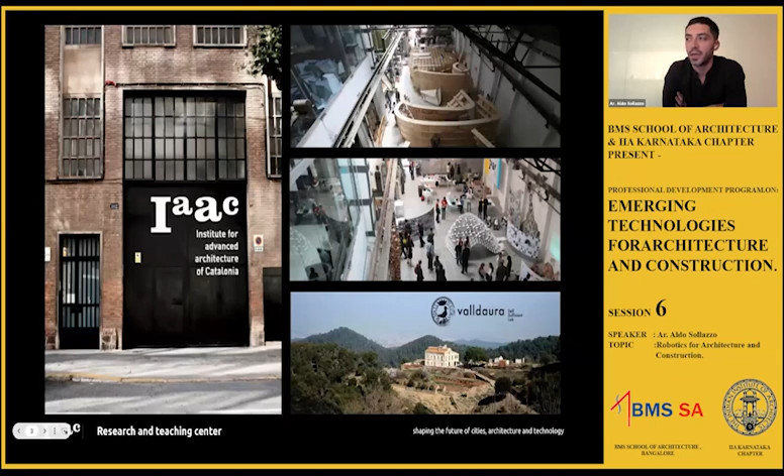First of all, you already gave an introduction of who I am. I opened the company of Numena in 2011, and for almost 10 years, I've also been working with the Institute of Advanced Architecture of Catalonia. The institute is located in Barcelona. We have different facilities distributed along the city, but we mostly work around the topic of research, education, development of solutions and agendas that can also go beyond pure academic interest.

And we organize, as you do in your university, in your school, a series of events like this one, expositions, publications, podiums, etc. But in Barcelona, IAAC, the Institute for Advanced Architecture, is also very important for the presence of one of the first Fab Labs in the world, Fab Lab Barcelona, which became a crucial point to spread this philosophy of advanced manufacturing and digital fabrication. This philosophy connects all the new tools and instruments arising in the world of design and manufacturing towards a new industrial application that can establish a new agenda on how things can be made, how can we be more efficient, more resilient, more sustainable in the way we think and make objects and projects.

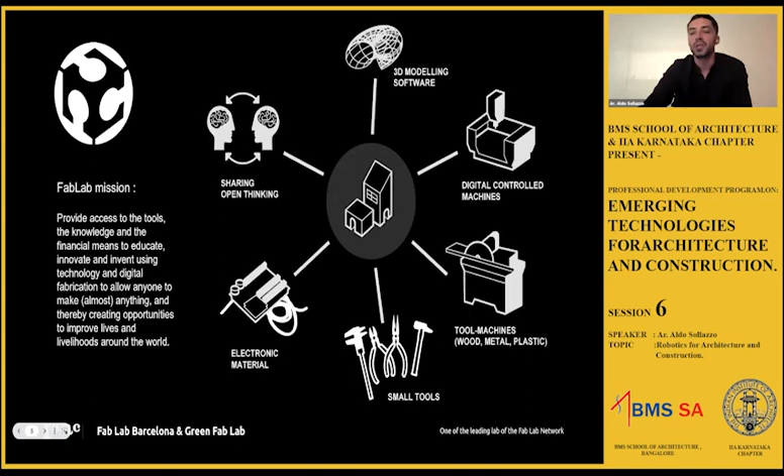So in order to make, we use a lot of cutting edge machines that I'm sure you also have in your facility, from big 3D printers to CNC milling machines, robotic arms. These are the instruments that we use to manipulate matter. But on the other side, we also like to introduce codes and algorithms that allow us to program digitally spaces, and control variety and geometrical solutions that respond to a specific manufacturing process.

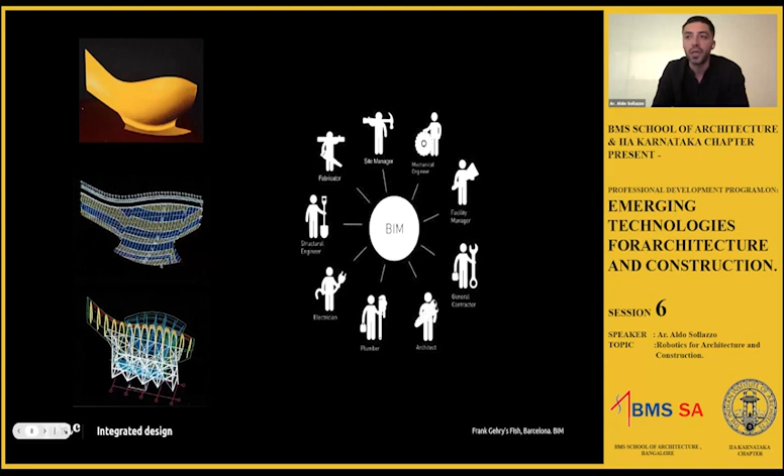Of course, all these criteria are always connected to how, historically, if you look at the history of building information modeling, Barcelona is a starting point for this. You can recognize on the left side the drawings, sketches, and the 3D model of this installation by Frank Gehry, an installation that represents the very first application of BIM, Building Information Modeling, even though it wasn't called that when Gehry was implementing it. It was about how to connect complex morphologies to a new fabrication protocol that allows shifting from the digital directly back to the physical environment. The digital and the physical are two main cornerstones of who we are in Barcelona, and how we operate in this ecosystem.

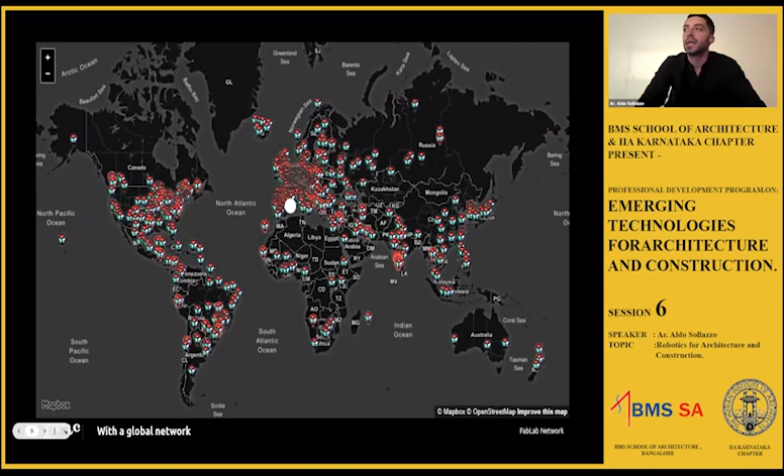All the world of Fab Labs that we initiated from the Fab Lab Barcelona is now counting on thousands of laboratories distributed all over the world. Collaboration and ecosystems are what we are deploying and developing the most, from the local scale to Catalonia, to the national scale of Spain, and then the international scale of Europe and the world. We collaborate with many companies, industries, research centers developing together with us, contributing to the evolution of what architecture is, what an architect should be looking at in the future, and how we can introduce and bend all this technology towards more sustainable and resilient solutions. So in IAAC, we work with a multiscalar approach.

From the city scale to the material scale, we believe that everything can be programmed. In every object we can include an embedded intelligence. But at the very end, we have a lot of tools, a lot of instruments, but as Cedric Price says, technology is the answer, but what was the question? So why do we need all these instruments? In which direction shall we use them?

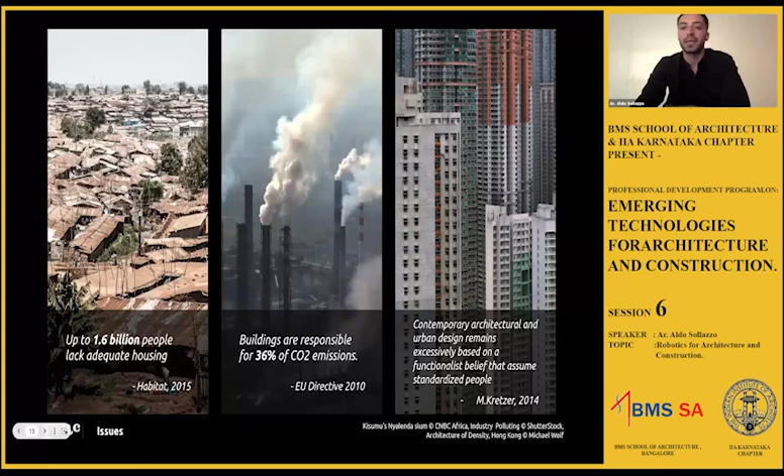In IAAC, for more than 20 years, we've been advocating the agenda of self-sufficiency. We've been speaking for 20 years about climate change, about energy and sustainability. But narrowing down the problem even more, we want to speak specifically about the problem of inadequate housing, the problem of greenhouse gases contaminating the air that we breathe, and the lack of standard solutions that at the end are extremely inefficient when implemented.

So we want to tackle the world of construction, because we believe that thanks to the convergence of all these solutions, we can shift toward fast and cheap new forms of construction. We can introduce new sustainable approaches to our built environment, including custom solutions that can encode local intelligence.

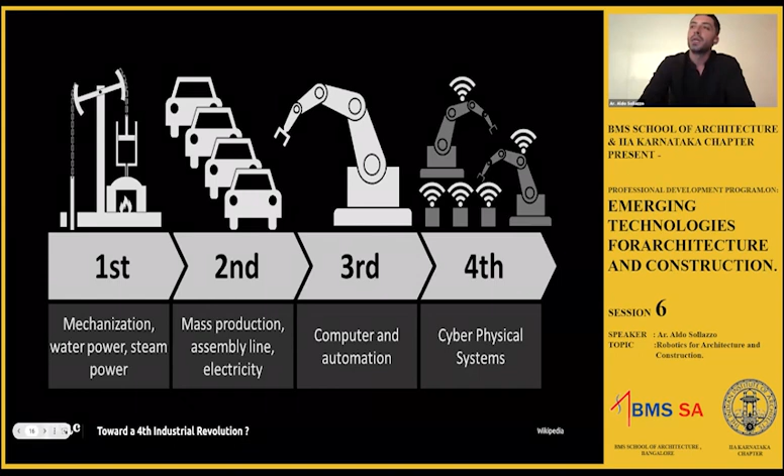So at the end, we are all witnessing, all over the world, trends that are becoming extremely evident in society nowadays. The shift from the first industrialization to the movement towards the fourth industry, to the sensing and cognification of machinery, shows that the historical moment we are living in is one that wants to rethink how processes are made, and rethink the existing processes of production and consumption.

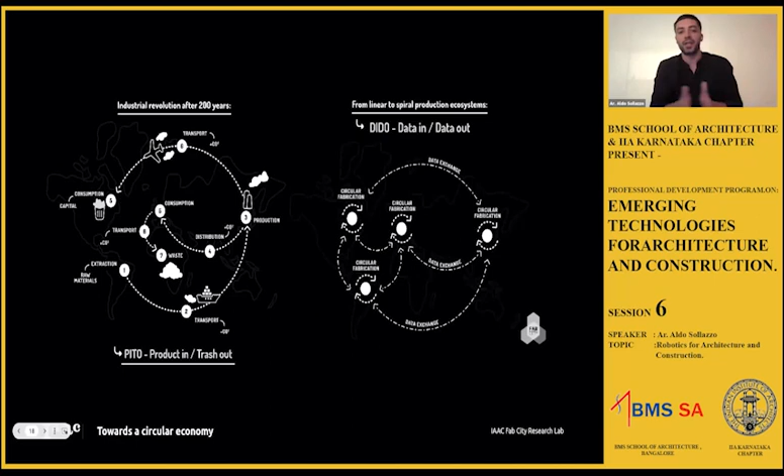This is why, in the trajectory we trace together at our university, we are always talking about two parallel ways of looking at these protocols: from linear protocols of production and consumption to circular processes, where we can shift from one model, PITO, product in trash out, to DIDO, data in data out. We believe we can produce and promote circular ways of thinking material, consuming and producing materials. This is also an important agenda of the Fab City protocol.

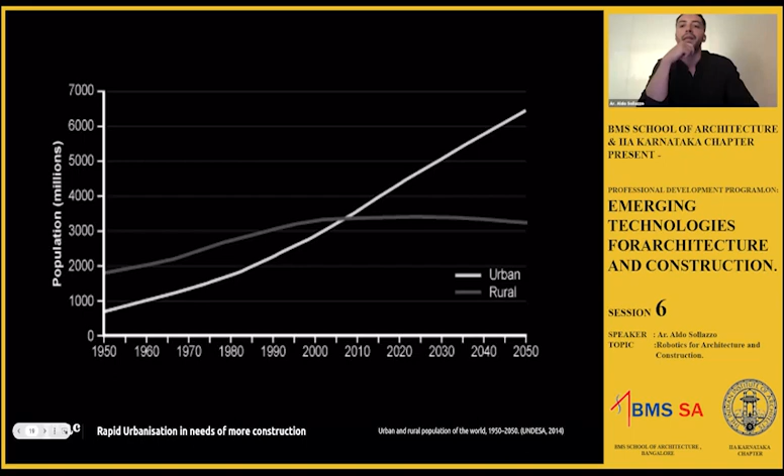That is an important movement that we also initiated, and now it's spread all over the world, in Barcelona. So if you look at the existing trends connected to our built environment, it's the first time in the history of humanity that the majority of people are living in cities. So cities are becoming the main habitat where we experiment with new criteria, new models, and also new habitats where it's possible to test and improve the way we look at production and consumption.

But nonetheless, if you look at the different sectors and the evolution of our society, from manufacturing, agriculture, transportation, the construction sector is improving and evolving in a very slow manner. In fact, our sector, the sector of construction, is less digital than fishing and hunting. It's the least digital sector in the world.

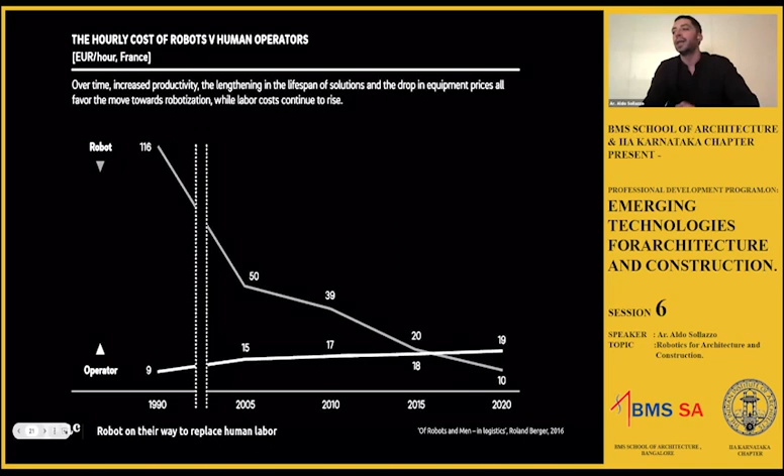But on the other side, if you look again at those trends, what is happening is that the cost of innovation and the cost of implementing digital machinery is going extremely down. In fact, it's also the first moment in history where implementing systems of automation like robotics becomes even cheaper than working with human labor in some cases—which doesn't mean we are all going to shift to robotics, but you will see in a moment how we look into this and what opportunities arise from the drop in those costs. So what this means is that this is the moment of innovation. This is a moment where innovation happens.

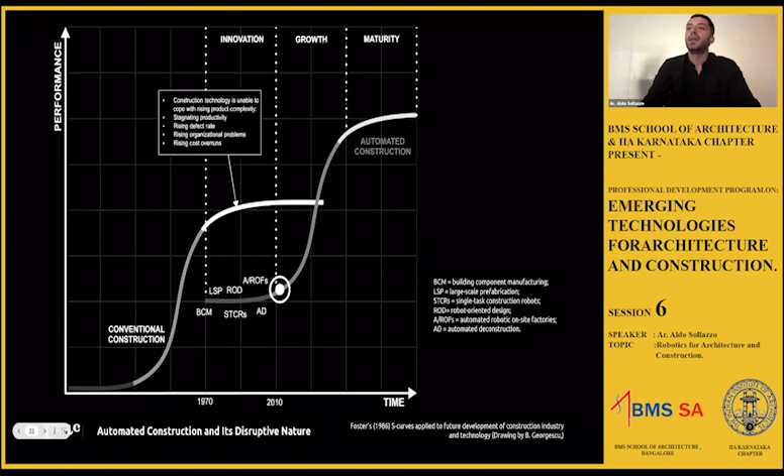Innovation can become mature enough to be digested by our society. This is the moment where we can not only start to think about new protocols, but really make it true. It's time to rethink digital fabrication and the world of construction. This is the trajectory we are going through at the Institute for Advanced Architecture of Catalonia, rethinking manufacturing from subtractive manufacturing to pick and place, carving systems, 3D printing, spraying, and other additive manufacturing protocols. We are constantly exploring what is next and how we can manipulate materials, including automated protocols of construction.

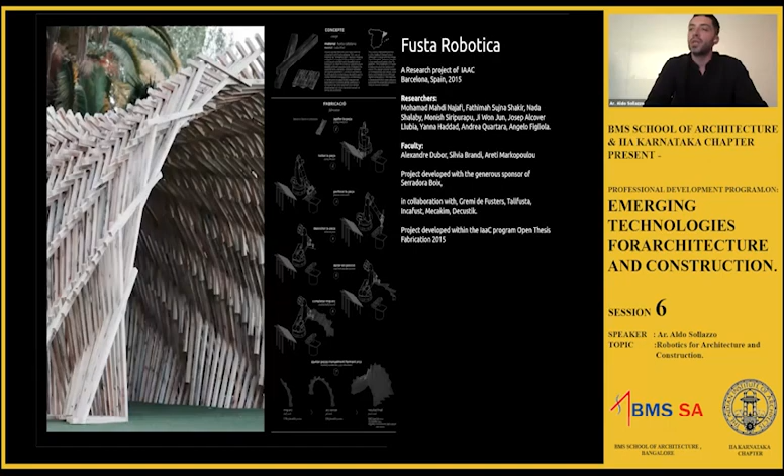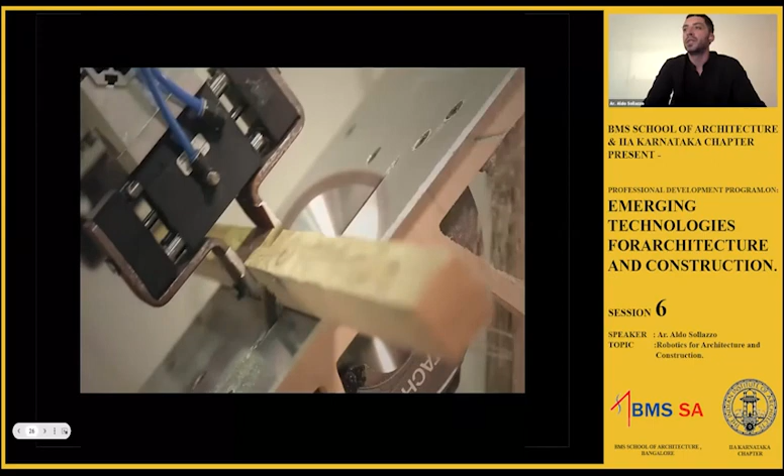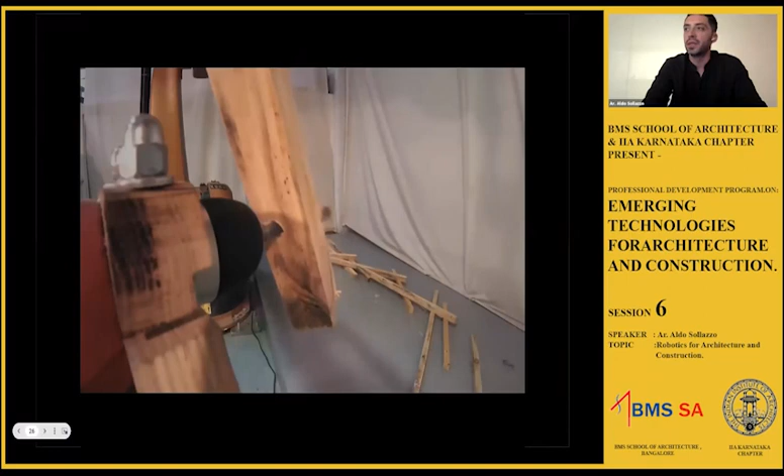What you see here is a small pavilion we deployed with our robot, created using a pick and place system that allows us to control and gather material, and from this material automate the process of manipulating individual sticks, creating a pavilion where every single element is different from the one before, but they all respond to a global intelligence. This is one of the processes for construction of this system, and the interesting part is that it was the real beginning of this new agenda of construction.

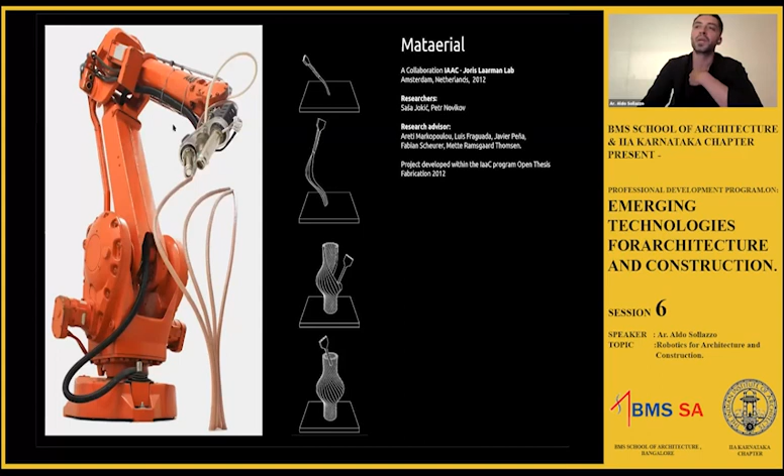If you're a little familiar with 6-axis robots, you know those robots have existed in the automation industry for a while, implemented mostly by the car industry. But with these robots now, architects, designers, and makers can also start to rethink how we manipulate and control material properties. We've been working, for instance, on a project called Mataerial, 3D printing in the air without the need of any support, by mixing a normal extruder. This is another project I invite you to have a look at.

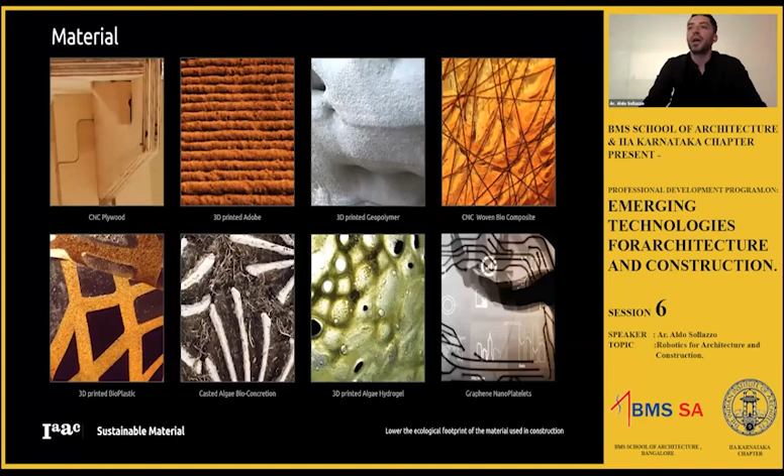But again, materials for us are the cornerstone, the key ingredients that allow us to introduce innovative manufacturing processes. Materials are what we experiment and research a lot at IAAC, from wood to adobe, biomaterials, bioplastics, concrete, hydrogel, nanotechnologies. We are constantly investigating new capabilities of materials to establish more complex, responsive habitats that can also be controlled and manipulated by automated manufacturing processes.

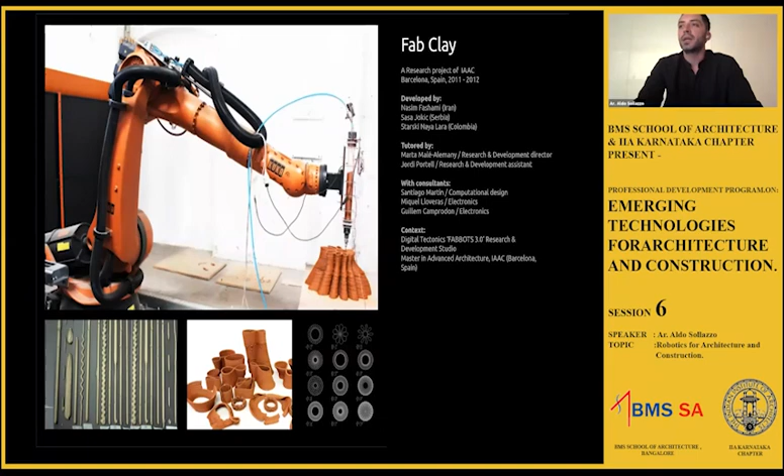So in 2011, we started research over clay, and we began to see how this ancient, noble material, part of the first chapter in the history of construction of humanity, could be introduced into a new system of construction and automation. This project started to evolve through the years, through the students.

And this is also something extremely important. I don't know, I see a message here—yeah, this message is not for me.

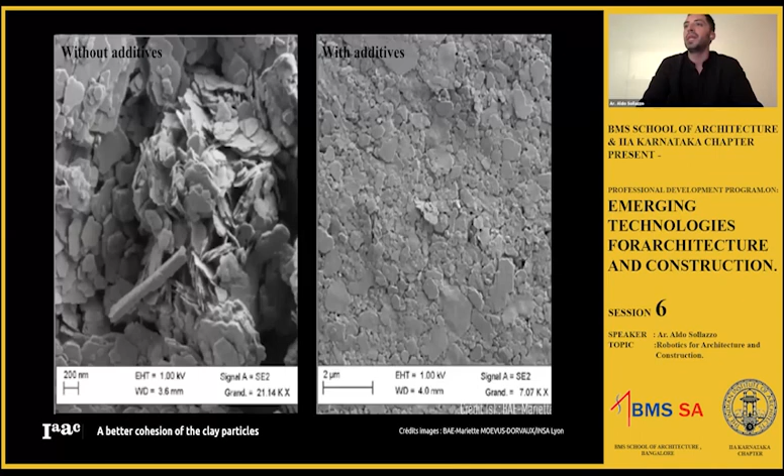This material has been controlled and improved through the years, collaborating with new architects and students. Through this process, we didn't only improve the material quality, but also increased the composition of the material, facilitating the hardening process, and improving not only the material but also the instruments of manufacturing. These are all the different iterations we've been doing, created in parallel.

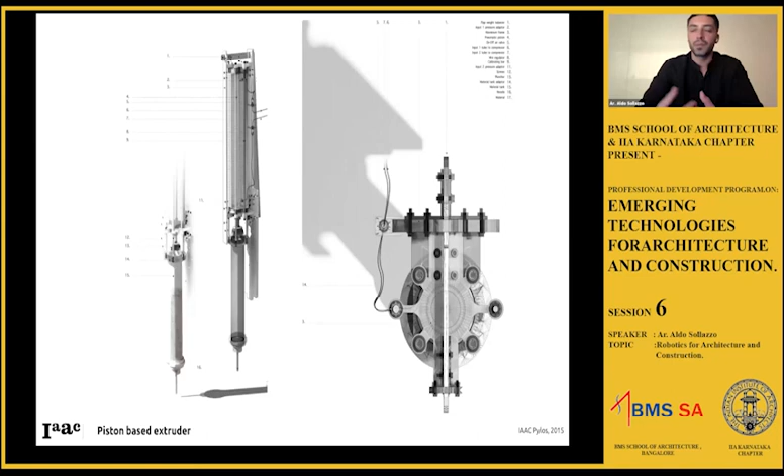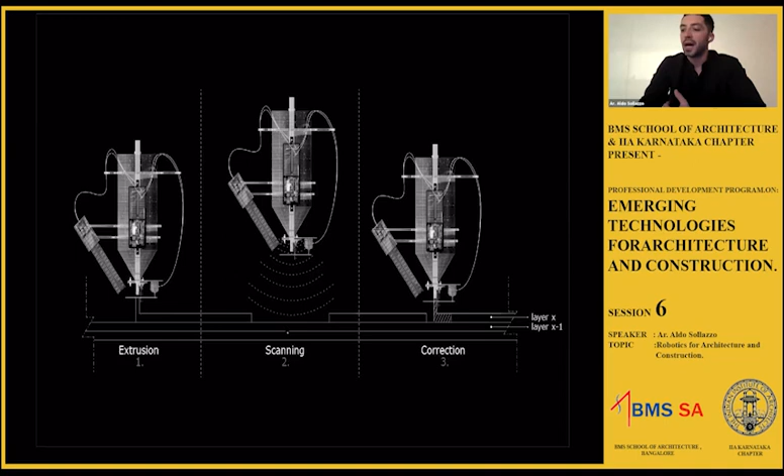An hands-on approach is what we always promote in our school and university, and it's extremely transversal. It doesn't only rely on the design part, but also on rethinking and redesigning our instruments, implementing protocols of design and manufacturing that allow us to fabricate, and then in real time sense and perceive the manufacturing process, allowing our system to adapt and correct whatever they are building.

So for us this is a new protocol of cognition, a new protocol of increased intelligence, where the manufacturing process becomes a responsive protocol of construction that allows us to adapt material changes and design protocols to a new complex environment. In this field, machinery becomes crucial to deploy a new responsive system of design and production, and for us it becomes another ingredient for creativity.

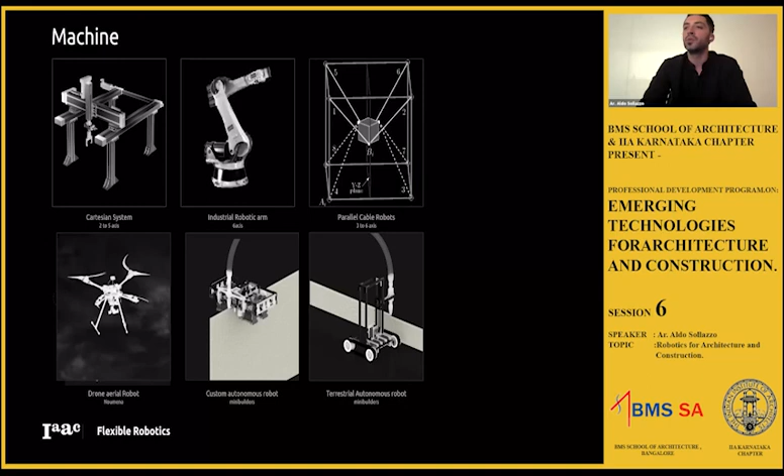In fact, we like to rethink our tools and our machines, and these are some of the machines that we use, from the six-axis robot you already saw, to individual instrument drones, rovers, or cable bots that we use to control and invent new one-to-one scale processes of construction.

In this case, we created a huge 3D printer of 10 meters by 5, implemented using a machine already present in industry. It's called CoGiro, and this cable robot was converted from pick and place into a huge 3D printer.

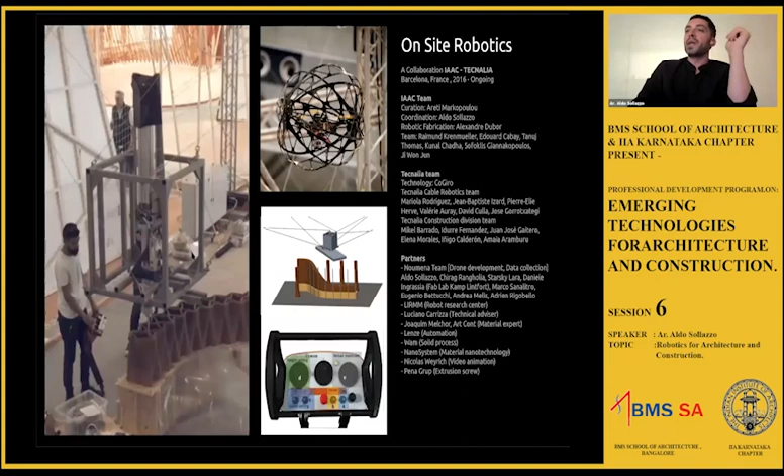The interesting part is that we started using this machine over and over, and we began encoding into the protocol of design and manufacturing a new system of construction. In the case of Construmat, a very important construction fair, we presented this new system to the world in 2017.

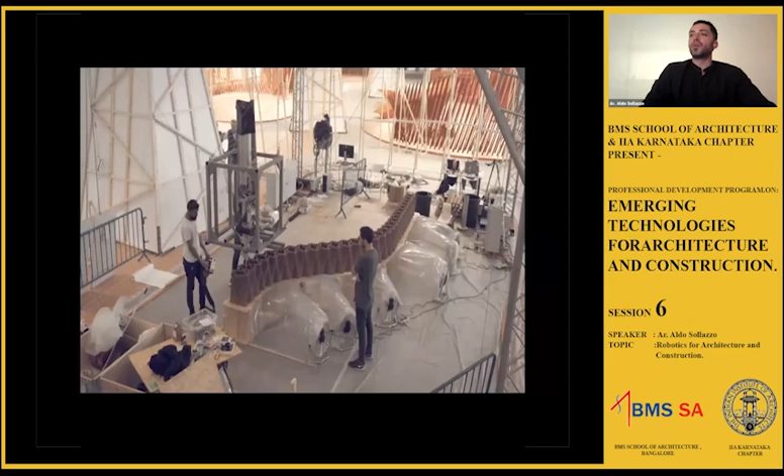Sensing devices like drones were cooperating inside the cable bot with this machine that was 3D printing clay. These drones were extracting information that let us understand in real time what the machine was fabricating, and send command feedback to the machine to correct and adapt to whatever was built.

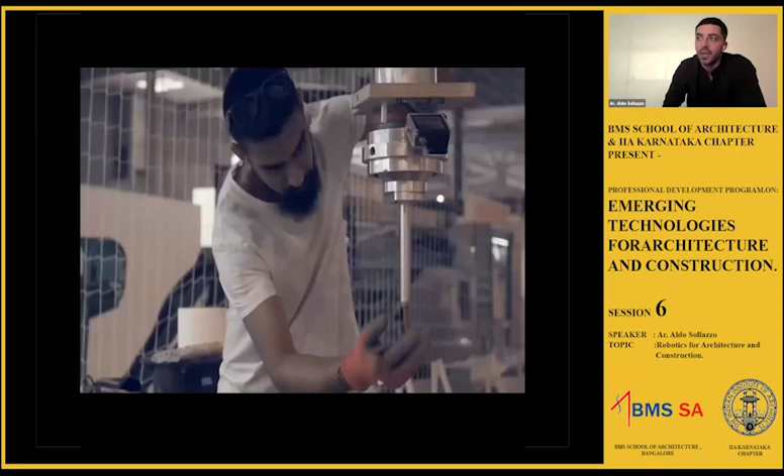So this is, at the end, the manifesto of a new protocol of construction where fabrication becomes extremely intelligent, where fabrication becomes, as I said before, a responsive system of construction capable of reading whatever it is producing and adjusting to all the protocols of production and fabrication.

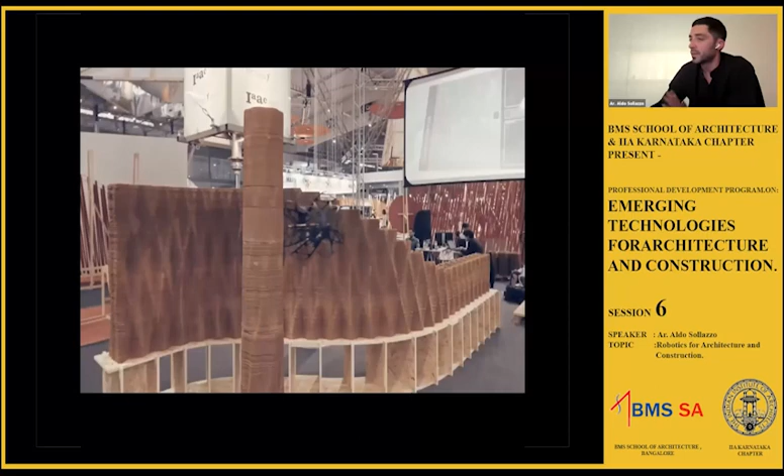But aside from that—okay, so what you can see is a little bit of how this project was carried out, and it's complex. The ecosystem behind it is quite complex as well.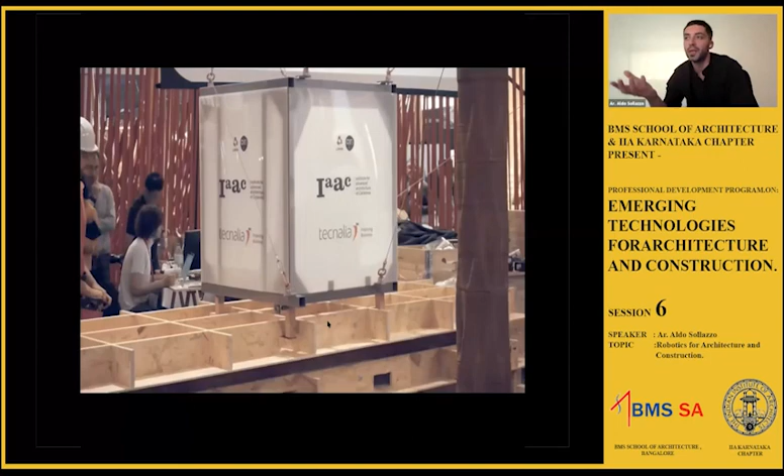If you want to build innovation, you need to collaborate. The different technologies you see here are the result of a convergence of Tecnalia, IAAC, and my company Numena. They started collaborating together at this very important construction fair to deploy this new manifesto of fabrication, and these are some of the results.

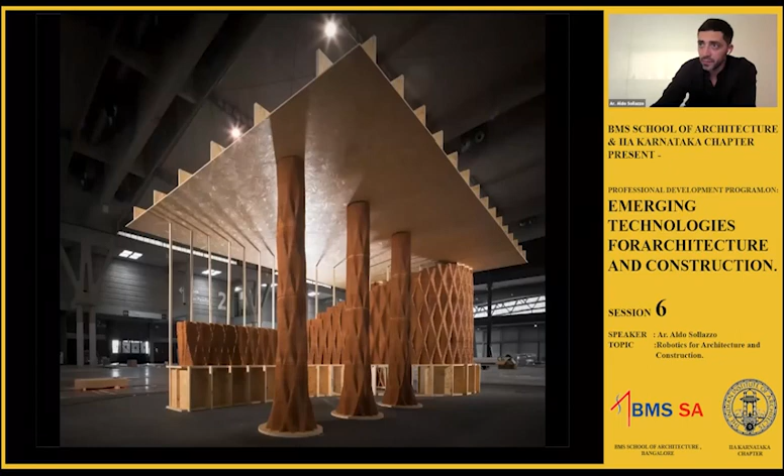In 5 days, we printed more than 7 kilometers of clay, creating this small pavilion that, at the end, is just a promise of what is possible. But this pavilion was then destroyed, and we reused all the material.

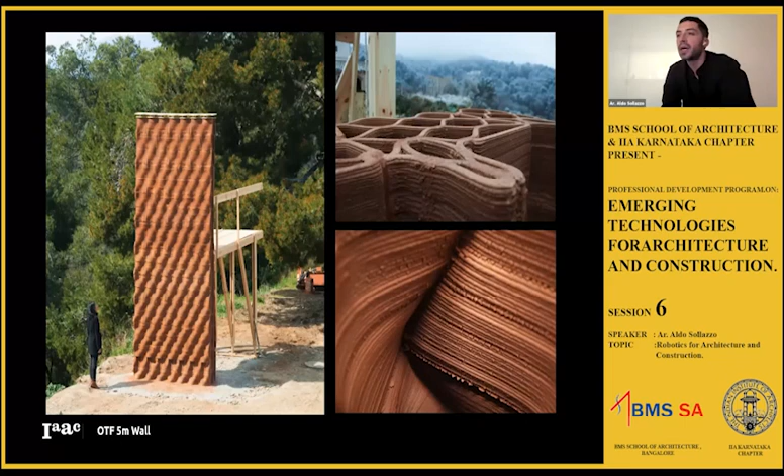This is also another interesting experience connected to the circularity of the manufacturing process. And with the same material, we started to create a new building in the open thesis fabrication together with Edouard Cabay and Alex Dubor.

So let me now shift to another robot. This is one of the best projects ever in IAAC. It's a project called the Mini Builder.

With this project, we wanted to rethink how a complex manufacturing process can be generated. What you saw before is a big machine we use to fabricate a big element, but we started to reconsider this paradigm.

We started to discuss what was possible if we were just discretizing the manufacturing process, creating a swarm intelligence that could allow us to fabricate big components by using small robots.

So in 2013, we came up with this process called the Mini Builders, and with these robots we experimented with how each one could respond to a specific task.

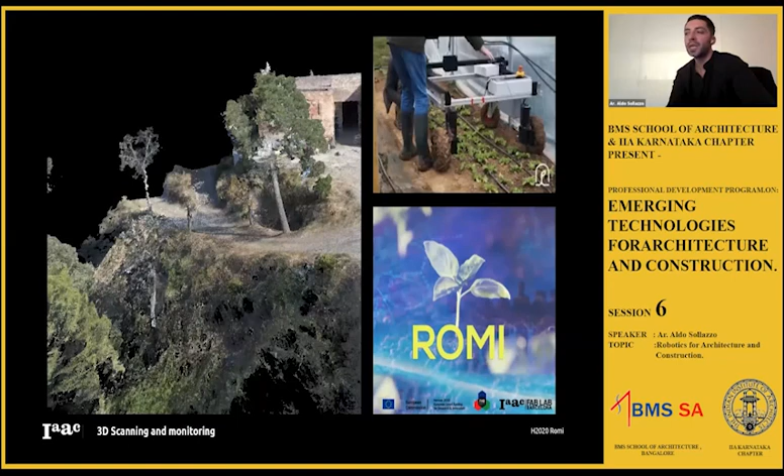With the project of robotics in microfarming, we've been exploring how to integrate automated robotic systems to improve the efficiency of a farm and help farmers, thanks to sensing technology, understand how to improve the yield and create healthier, more productive plants from their crops.

So at the end, with all the projects of IAAC, we are experimenting not only with materials, not only with new protocols of robotics that can manipulate our habitats, but also new compositions, new elements that can become part of a more complex architecture that wants to respond, adapt, and adjust to this complex environment where we live.

All the material intelligence you saw before, and the possibility of programming behaviors into materials, is represented here with a full range of material possibilities we've been fabricating and deploying in IAAC. Here you can see some results of what we've fabricated: materials that can respond to humidity, materials that can inflate, materials that can control the temperature of an environment, regulate ventilation, absorb humidity from the air, generate energy, be programmed through advanced polymers, or be reconfigured according to shape memory alloys.

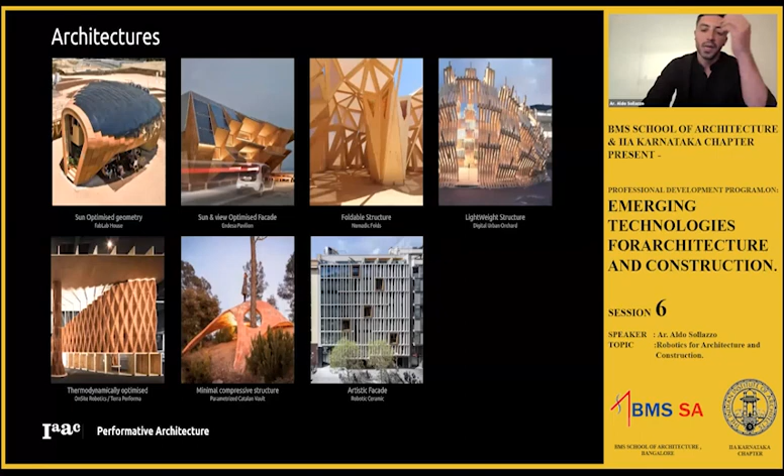But all these materials and new components of architecture that we are experimenting with are, in the end, represented by one-to-one scale buildings and installations that we construct. From the very first digitally fabricated house built in the world, which we built in 2008-2009 for the Solar Decathlon—the Fab Lab House—to the artistic facade installed here in Barcelona, built with a 6-axis robot.

In 2018, we also presented to the world the first 3D printed bridge installed in a public space in Madrid. This bridge was fabricated together with Acciona and Enrico Dini using 3D printing, and it had to cope with a lot of complexity when building this kind of innovation.

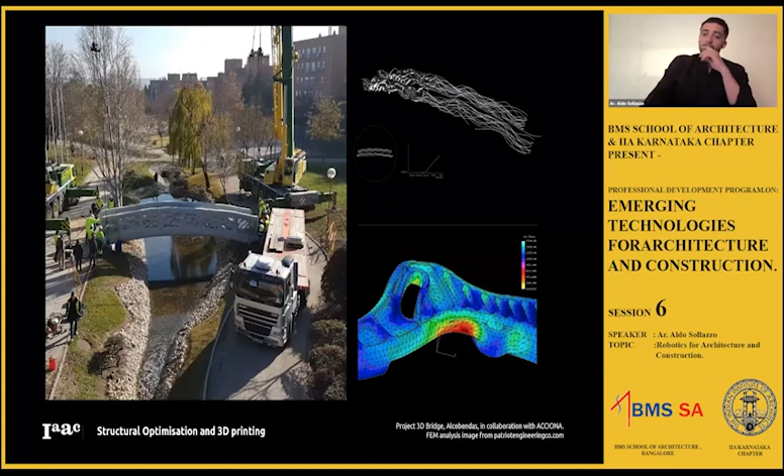Complexities are also associated with legislation and the need to shape or modify whatever is already established. The interesting part is that when you do innovation, you need to do it 360 degrees—not only in terms of design, but also in terms of introducing this innovation into a society that might not be ready for it. I'm sure you know what I'm talking about.

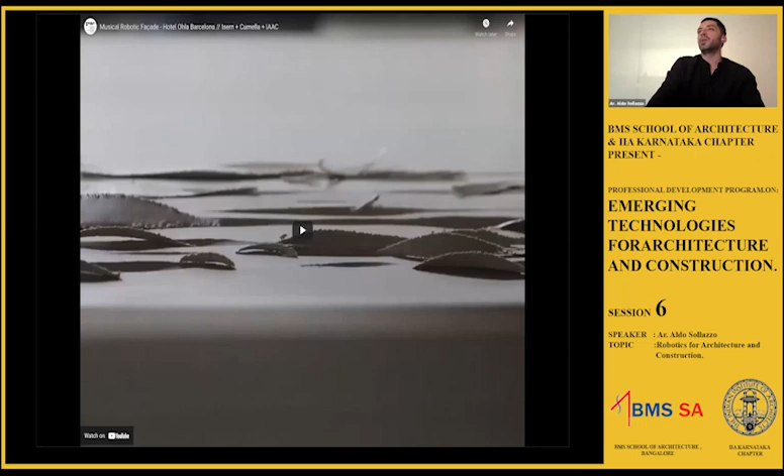How can we start to increase the intelligence of our built environment, improving the thermal performance of walls? This is something we experimented with in 2012. Or how can we start to address personalization, using customization as a new instrument—a new medium to artistically encode aesthetics, performance, history, etc. with this process. The interesting part is that when you do something like this, you start establishing bridges with craft and with industries already operating in the environment.

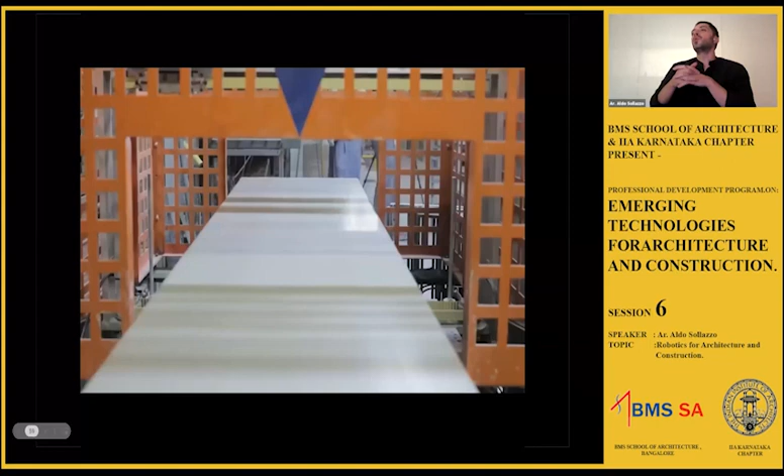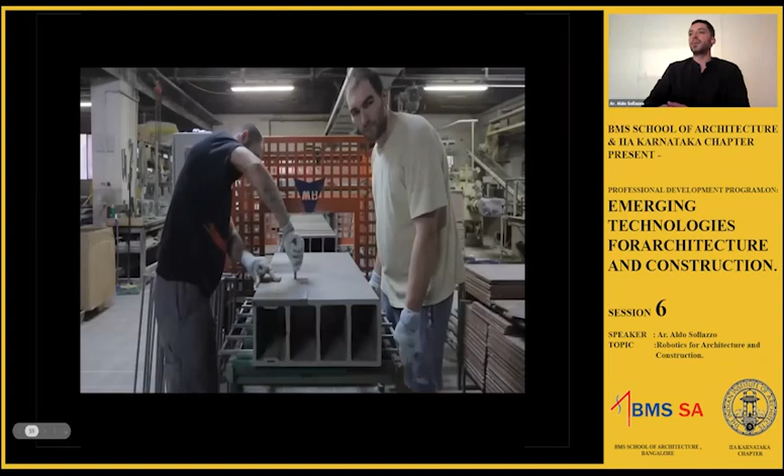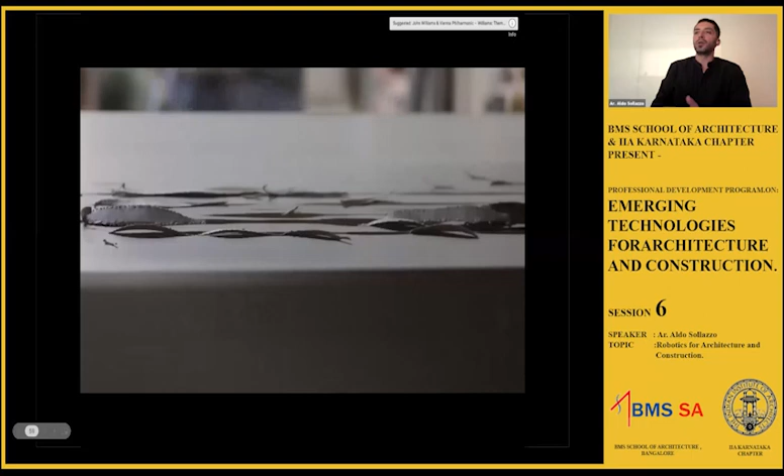In this case, we started a collaboration with a very important ceramic industry in Barcelona, showing them what was possible using a 6-axis robot to manipulate clay in an artistic way. We encoded Beethoven's music into a series of algorithms and created a new material process where the robot carved deeper into those panels according to the highest notes of the music. Here you can see the movement of the robot, carving those ceramic panels according to the notes of the music.

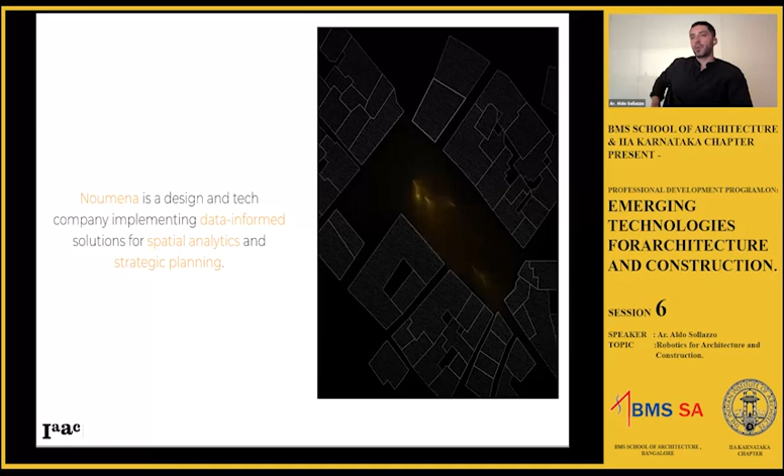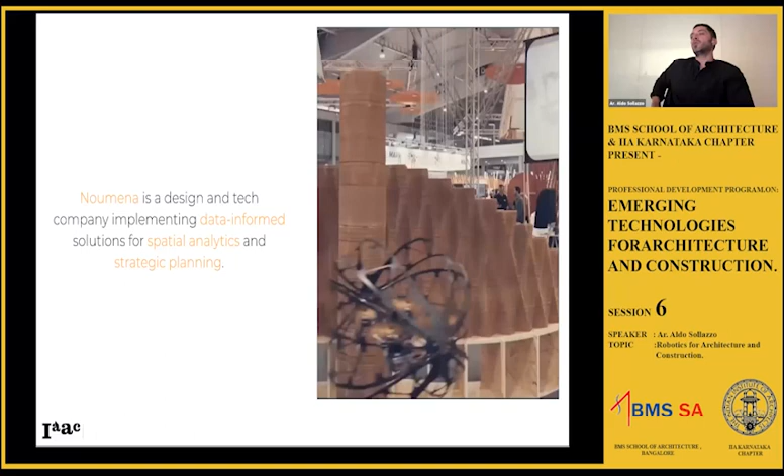All this was then converted into a facade. Now we can shift from IAAC to the work we deploy in Noumena, my company. There, we implement data-informed solutions for spatial analytics and strategic planning, meaning we use a lot of robots to decode complexity and feed digital data into decision-making processes, allowing us to better inform solutions that shape spatial transformations.

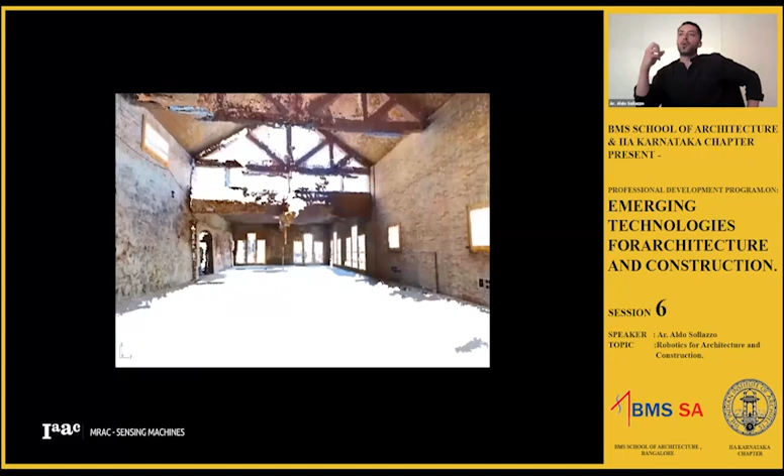In this series of projects, we are mixing many different experiences—the ones I personally develop in my company, and the ones I deploy with my students in the Master in Robotics and Advanced Construction at IAAC, where what's fundamental is how to sense and digitize our built environment, and how to convert these digital bits into information that can truly trigger new design solutions.

So let me just frame this presentation. We will talk about the framework of this operation, then I can dig into the state of the art. I can give you the objectives of all the action that we are performing, and then I will show you very quickly the project that we are deploying in this world.

I'm an expert in data analytics, but whatever we do at the end has a spatial effect. As Laura Kurgan says in her beautiful book called Close Up at a Distance, she speaks about the big shift that happened when the Bill Clinton administration opened access to GPS data to the world population. Before, this data was only used for military purposes.

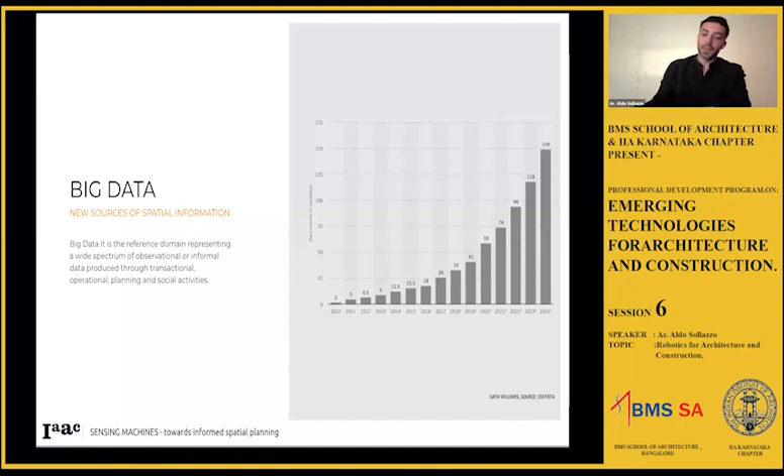The unstructured data is all the data connected to media. It's complex to catalog in an Excel file, in a normal format that allows us to describe it numerically. Media are complex to describe numerically, and that's why media are complex to use in terms of information, or let's say, complex to use by computers.

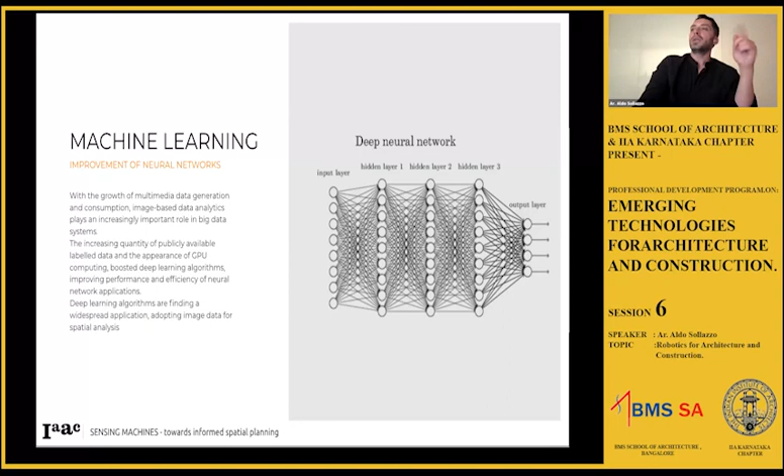What happened is that thanks to machine learning and neural networks, it is nowadays possible to create a new connection between images, which are unstructured data, and spatial phenomena. So all the work I do in my company with my colleagues, and also my personal research with my students at IAAC, is about how to connect image-based data to spatial phenomena.

They can serve for establishing new design protocols, or they can serve to trigger different fabrication processes. The state of the art of these media relies on the evolution of computer vision and machine learning, but mostly the actions we perform are connected to one specific approach called object detection.

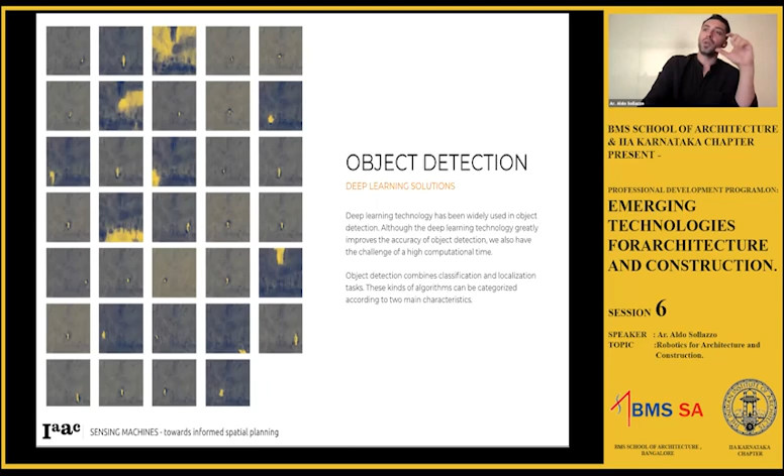How can we recognize objects in an image? We can do it in real time, or by implementing deeper algorithms that work at maybe 13 to 15 frames per second, so a little slower than a real-time process.

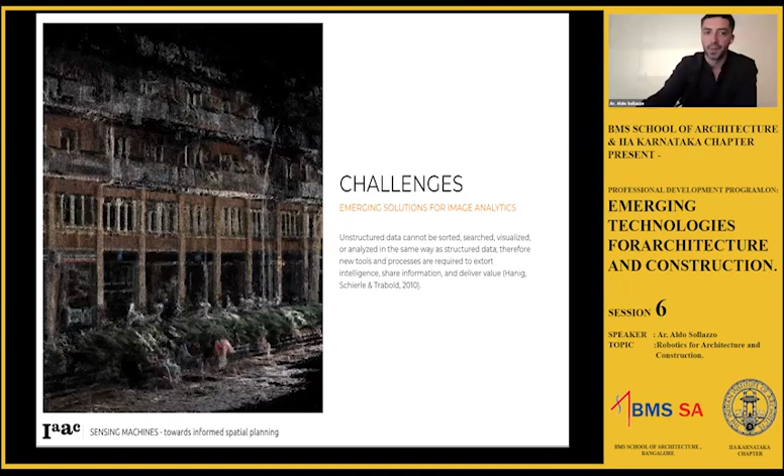But what is the challenge behind it? The challenge is how to use these data sets, which are quite complex, to sort and classify media and images, in a way to encode spatial analytics and maybe also define fabrication processes. This is the challenge of this approach.

This approach is deployed through my master's work and my professional experience at three different scales: the urban scale, the building scale, and the environmental scale. At the urban scale, I'll go deeper later on this project, but let me first clarify that all the approaches we deploy as a company always respond to a very similar protocol.

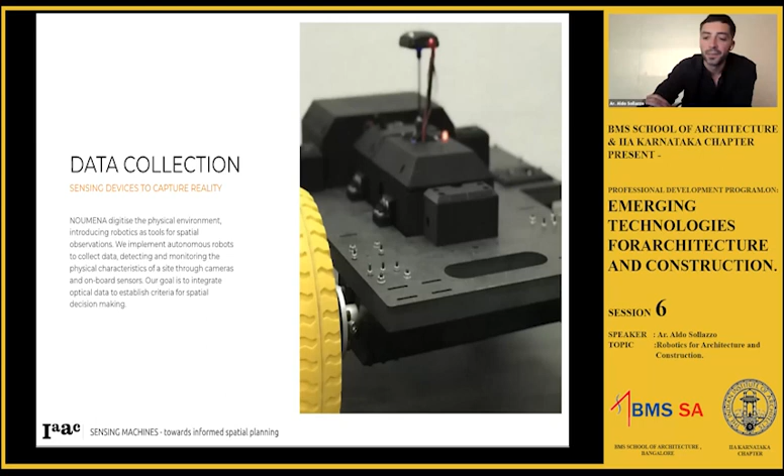One crucial part is connected to data collection: how to automate a system that can capture information from our environment. Other approaches are connected to digitization: after data is collected, how can we represent this physical environment digitally?

This representation means we start to build a digital twin, where information suddenly becomes a new material that we can classify, sort, and reorganize. In this environment, this information becomes a new triggering source that allows us to look deeper at spatial dynamics and start to implement machine learning and artificial intelligence.

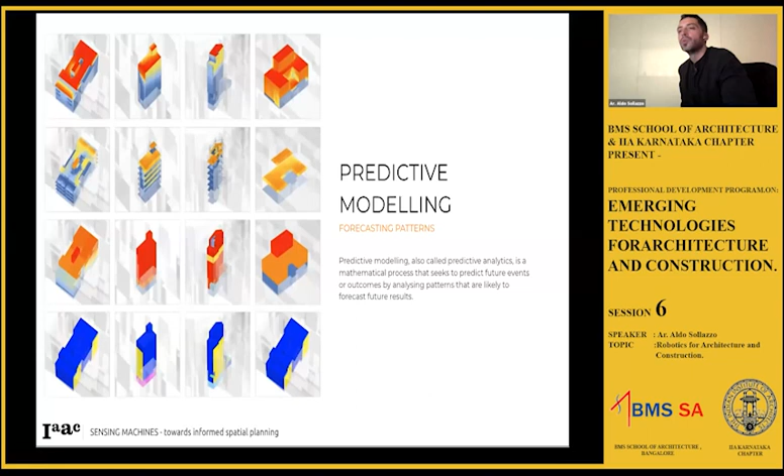We explore these spatial phenomena, often associating static and dynamic components into one unique scene. All this knowledge is useful not only to represent whatever is in front of our eyes, the present, but also to start picturing future behaviors and future performance, where this new data set we can encode becomes a system used for predictive modeling.

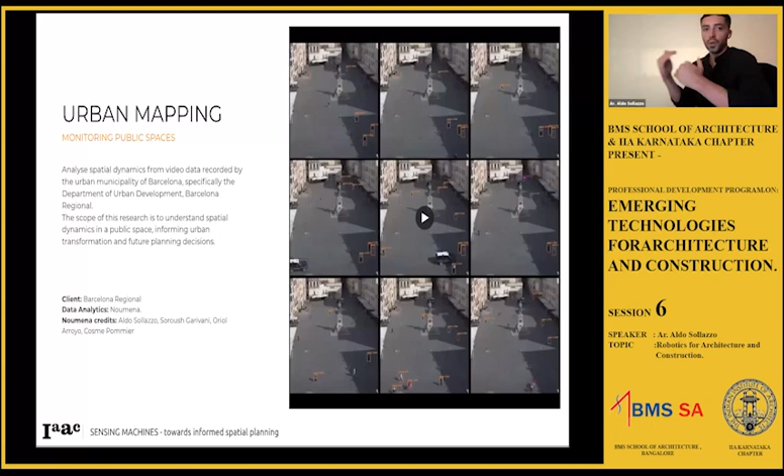So let me use some cases from urban mapping, the urban scale. We are working with Barcelona Regional, so look at how we operate. I spoke about the university, now I'm speaking about my company, but there is always a huge interconnection between these systems. At the urban scale, we work with the Department of Urban Development of Barcelona. You know that in 1992 there were the Olympics, and Barcelona changed her face.

And this is thanks to this department that works at the urban scale, but also wants to explore new instruments. So what we did for them, what we are now doing, is create new platforms, new instruments.

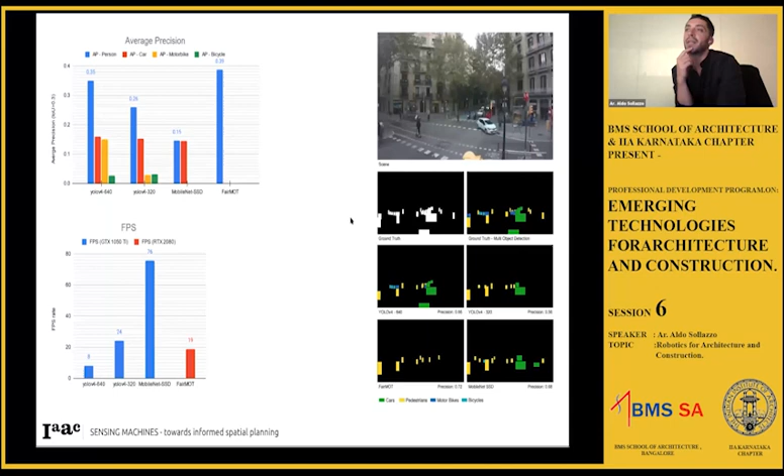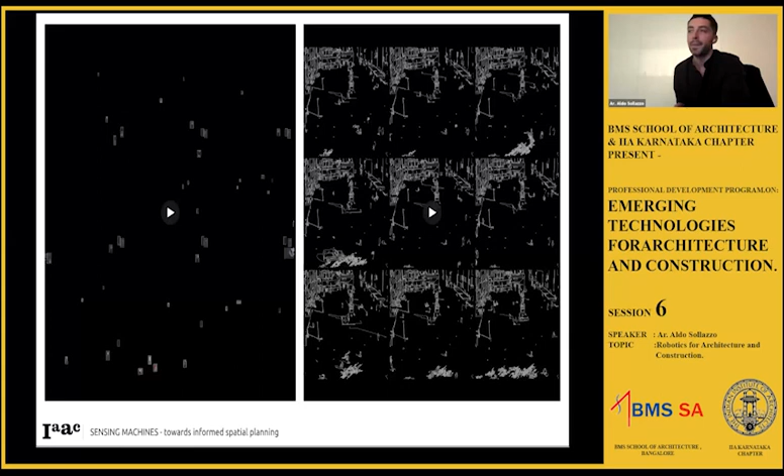These allow us to analyze spaces, including systems for object detection that give us a more real-time picture of which actors are occupying a public scene, how much they are polluting, and how we can feed this into a data set optimized to store information and support urban planners in activating new dynamic systems and protocols that can shape different cities.

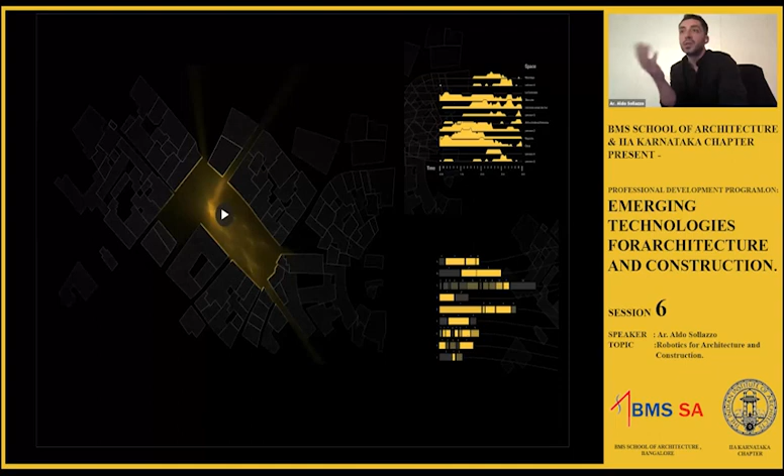So how can we block the access of cars if suddenly there are too many? How can we envelop the urban environment and create plazas where, one minute before, ten minutes before, there were cars? All these are responsive systems that need to respond to real-time challenges, and for this we use computer vision and machine learning.

On the other side, we also include automated systems that aim to improve the resilience of our cities, promoting urban transformation, including urban greenery—trees, plants, etc.—to lower the heat levels of our built environment. This is possible by analyzing the shadows produced by the trees and the CO2 that is absorbed.

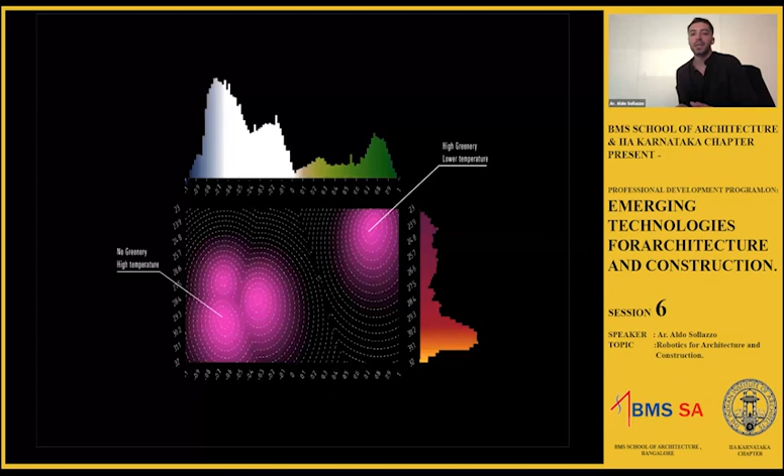To do this, we use robots to collect data and analyze plants and their robustness, while overlapping thermal data that allows us to measure heat levels in a given environment. We do this in order to create spatial metrics that support urban planners in the distribution of greenery, a practice at the urban scale called urban forestry.

Now, talking at the building scale, in the company and also in the IAAC, we again use point clouds to classify the different components that are part of a built environment. We do that by creating clusters and segmentations that allow us to understand the nature of every single component in space, starting to shift towards building information modeling.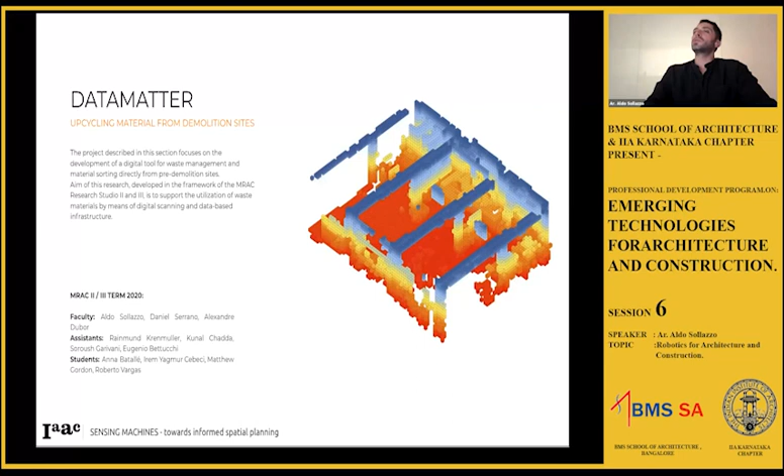But that's not the only thing we do. With my students in the Master in Robotics and Advanced Construction, we also use image analytics to start classifying the different materials that are part of a building site where the building needs to be demolished.

Before demolition, we use automated systems for data collection to start classifying the materials that are part of the scene, associating each material to a specific family of elements. This is also a process that I would like to show you.

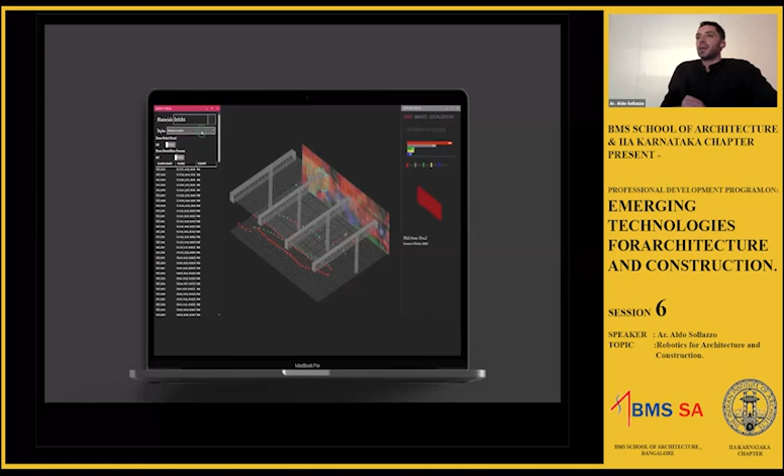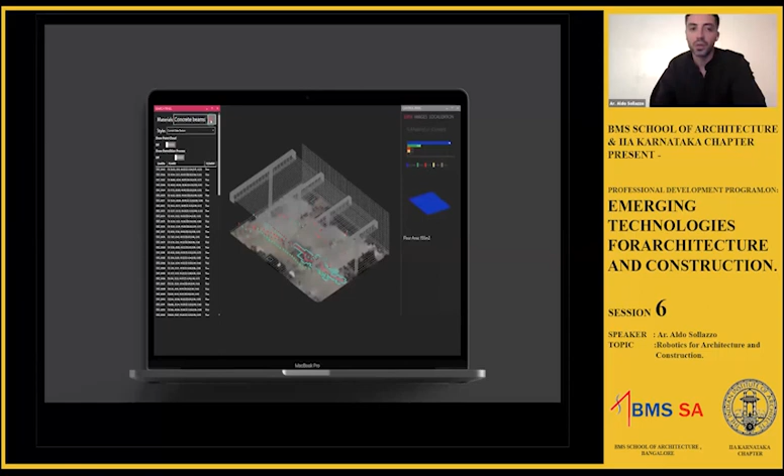It's a startup that we launched with the Master in Robotics and Advanced Construction, now incubated in Paris, in the Riven program. With this startup, starting from the point cloud, the photogrammetry, etc., we analyze all the different components that are part of the scene, representing this new complexity in an interface that can be used to bring back into the construction cycle materials that would otherwise become waste.

So this is also a very important approach, another demonstration of how we can use sensing machines in order to trigger spatial transformation.

On the other side, let me conclude with the agricultural scale, where agriculture is also a space and environment that we need to design and program. For five years we've been working with Sony Computer Science Lab, IAAC, Humboldt University, CNRS, INRIA, and my company Noumena, in order to deploy automated systems that allow us to observe the environment and, on the other side, cooperate with farmers to support agricultural practice.

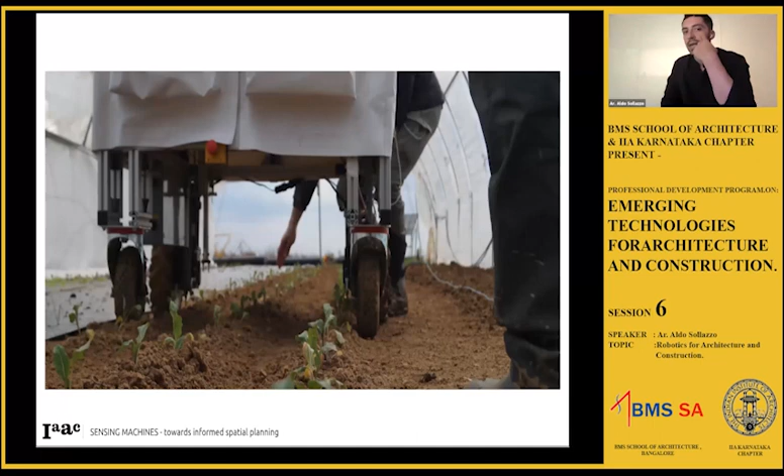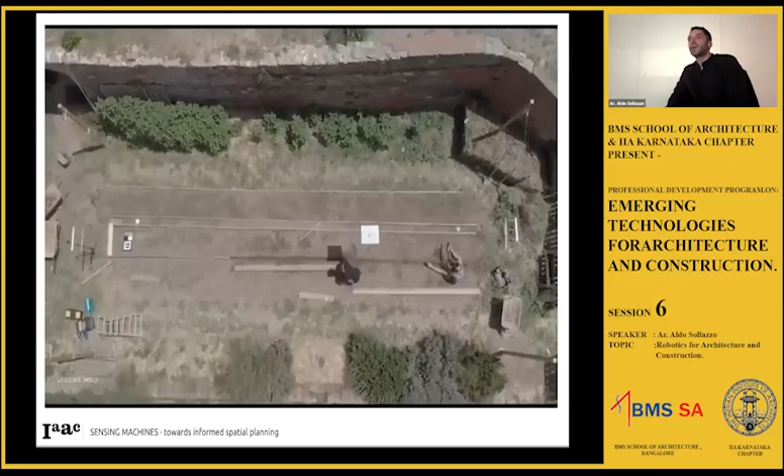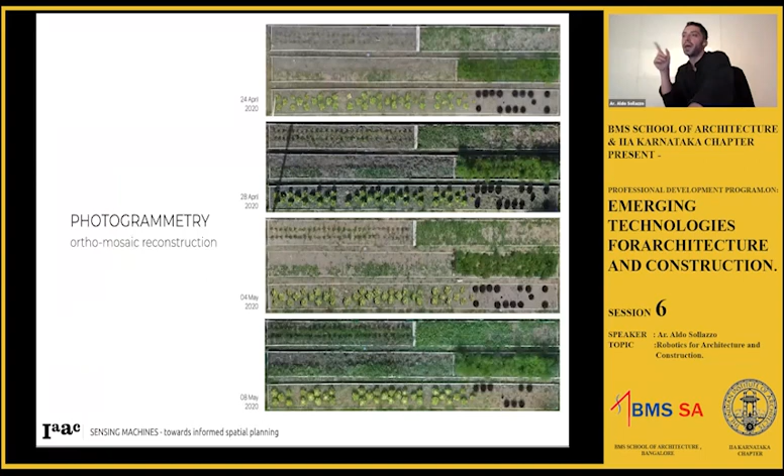So from one side there is the eye, and on the other side there is the hand. What we built is a new platform called the Farmer Dashboard, which allows farmers to extrapolate information from their crops and implement systems of machine learning and computer vision that track the growth over time of a given plant, providing growth curves and classifying every single plant according to a protocol of machine learning and computer vision.

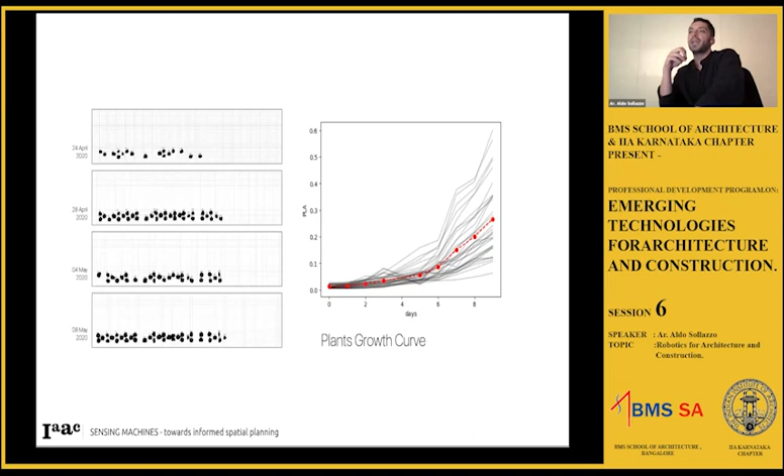This catalog is then connected to the digital platform, telling you over time the growth of this lettuce—if the plant is getting enough water, if it's dry, if it needs to be extracted from the soil, if it's been measured or not. All of this is built in order to help the farmer create or generate instruments that can improve the efficiency of those environments.

Let me conclude with the last project, which is again connected to the agricultural and environmental scale. This is a project in which we've been using data collection and automation to rethink our material resources from the beginning, so from the forest.

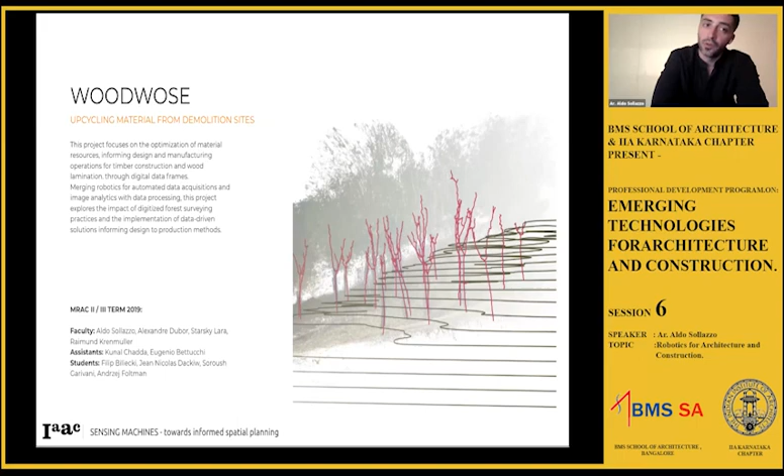We've been using an automated system of 3D scanning to create discrete catalogs that could improve the efficiency of laminated wood panels.

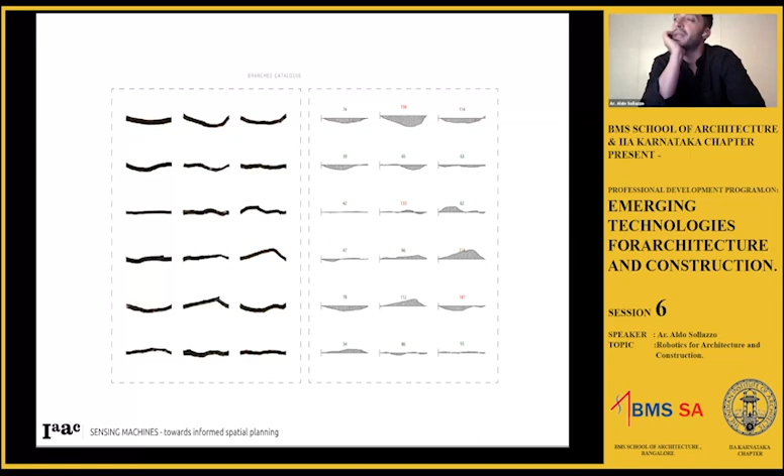And facilitate the generation of bended elements that could immediately be allocated to a specific place in the forest. So all these parts support a custom lamination that responds to specific project requirements, where there might be more complex or articulated geometrical shapes. But at the end we go back to the full cycle of sensing and manipulating matter. All this sensing data is afterwards converted into a manufacturing protocol where the panels are manipulated and converted.

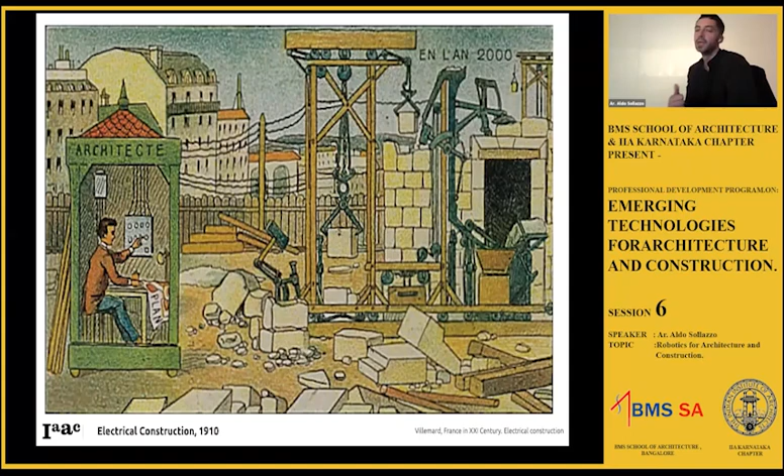To conclude, these are some of the publications we've been producing, but I want to speak a little about the future, which is the future of construction. The future of construction is one where all these capabilities of sensing, novel tools of manipulation, design protocols, etc., will come together.

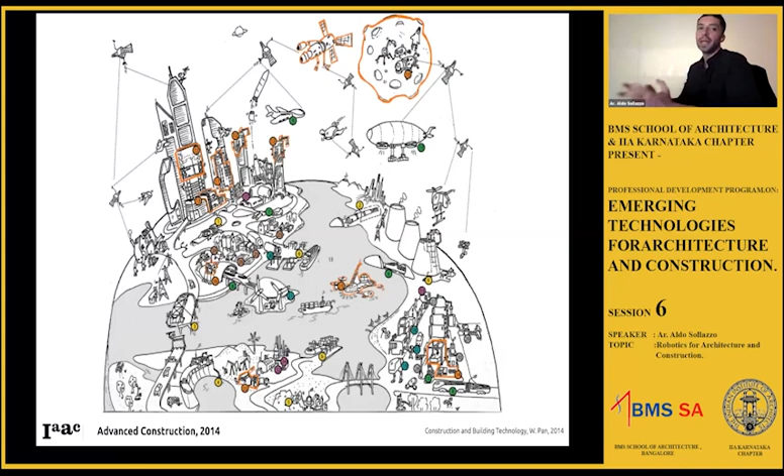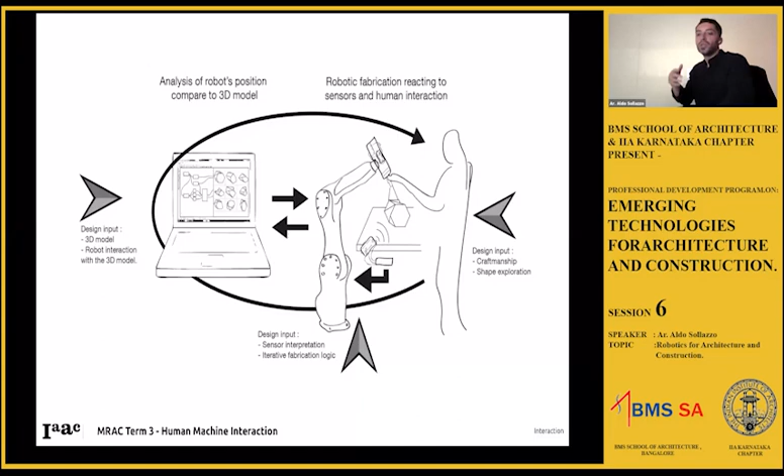How do we do that? These are some of the things we are exploring in Master in Robotics and Advanced Construction, but I would rather say these are things that, together with your university, we are exploring nowadays. This is evidently a direction where we can all contribute in terms of innovation and growth. Thank you.

Thank you, Aldo. That was really a very interesting presentation, because a lot of these things that you discussed we have heard in theory, but to see you explain your projects, I think it gives a lot to the students, especially those present in the attendees list. I'm sure they would have learned quite a bit. Personally, I had one question.

Usually in heritage conservation, since I'm a heritage conservation architect, we work with the restoration of buildings. A lot of the time we would document physically with measuring tapes and really rudimentary tools. We would document buildings, and then based on whatever the requirements are, we would have to reconstruct an entire building. So how do you see robotics and everything you discussed helping a field that really requires a lot of detailed documentation and then kind of replicating the same thing, but maybe with slightly better materials? Do you think this field could help out heritage conservation?

Thanks, Shreya, for your question. That is a very, very good question and absolutely on the spot for what I was mentioning. So thanks a lot for it.